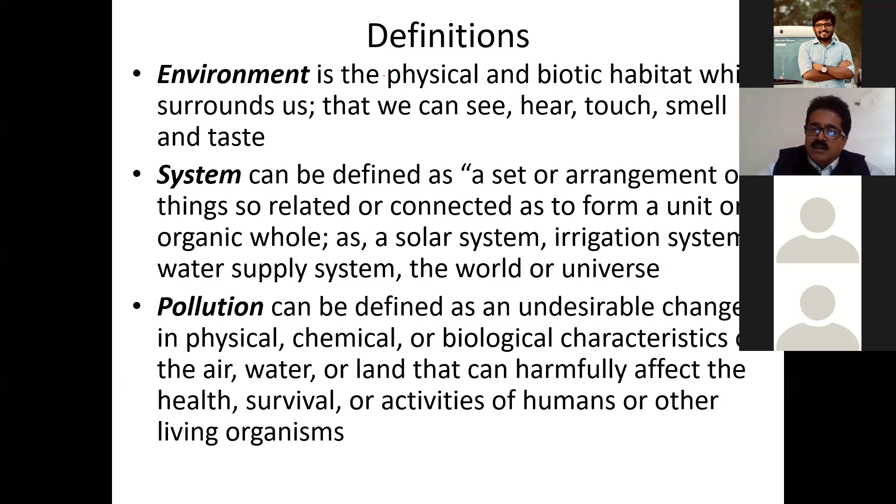The common word associated with environmental or civil engineering is pollution. So how do we define pollution? Pollution can be defined as an undesirable change in the physical, chemical, and biological characteristics of all aspects of environment, that is air, water, and land, which can influence or affect the health of people, survival, and interfere in all the activities of humans and other living organisms.

For example, if you take three systems, that is air, water mass, and land or solid waste, how they interact amongst themselves. For example, acid rain - how acid rain is developed or formed in the atmosphere.

Acid rain is a secondary pollutant formed because of the release of SOx and NOx from vehicular pollution. As these pollutants go into the atmosphere, because of multiple and continuous chain reactions in the presence of sunlight and moisture, they ultimately become acid mist - H2SO4 and nitric acid. When there is precipitation or rainfall, it washes down all these mists, and what we get is acid rain. Typically, acid rain has a pH of around 5.4 to 5.5.

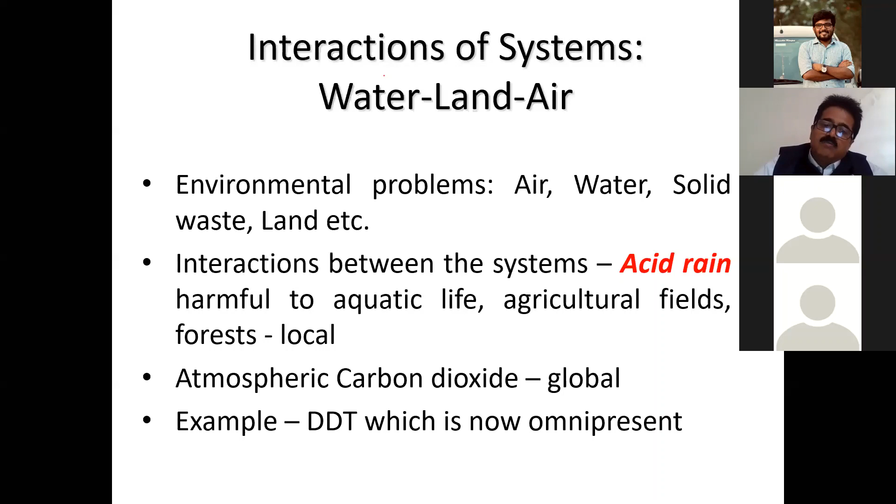Another aspect is air pollutants. Air pollutants, when released to the atmosphere, don't travel in a fixed direction. Depending upon the wind direction and wind velocity, they can go from one city to another, one state to another, one country to another, or even from one continent to another.

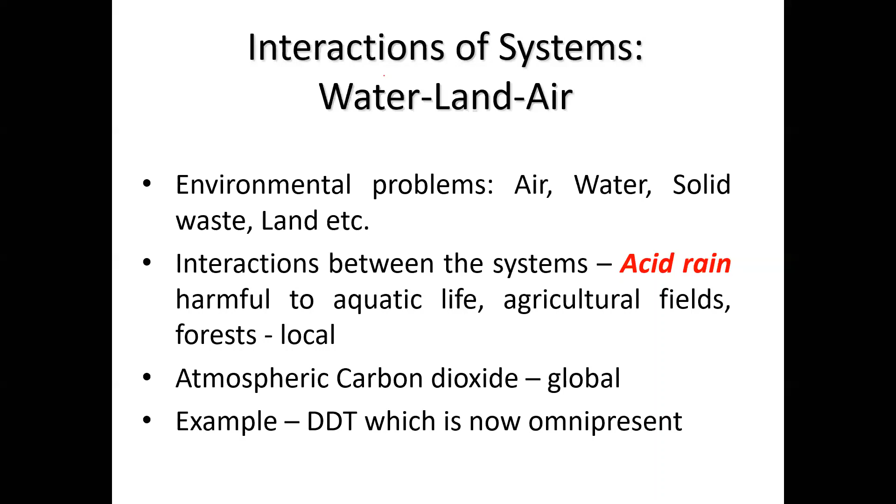There are some pollutants which are present everywhere in our environment - omnipresent, like DDT, which we use as an insecticide. Of course, DDT is banned throughout the world, but in India we're still using it, and traces of it can be seen everywhere.

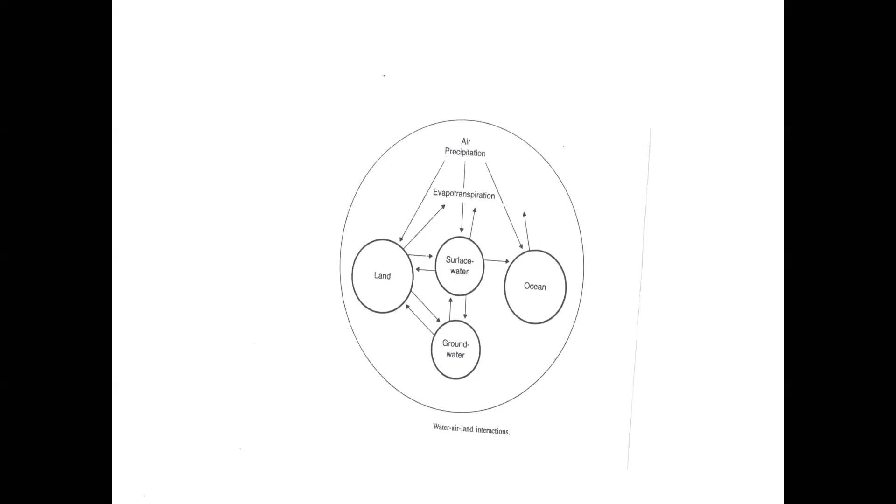If you look at the interaction of water and land, they are very interrelated to each other, like evapotranspiration forms clouds, which again brings rain to the earth.

If you look at the major benefits of science and technology, with improvement in science and technology, the standard of living is improved, and we are producing more and better quality food. This is again because of better science and technology, innovation, and research, and we are also creating better living spaces.

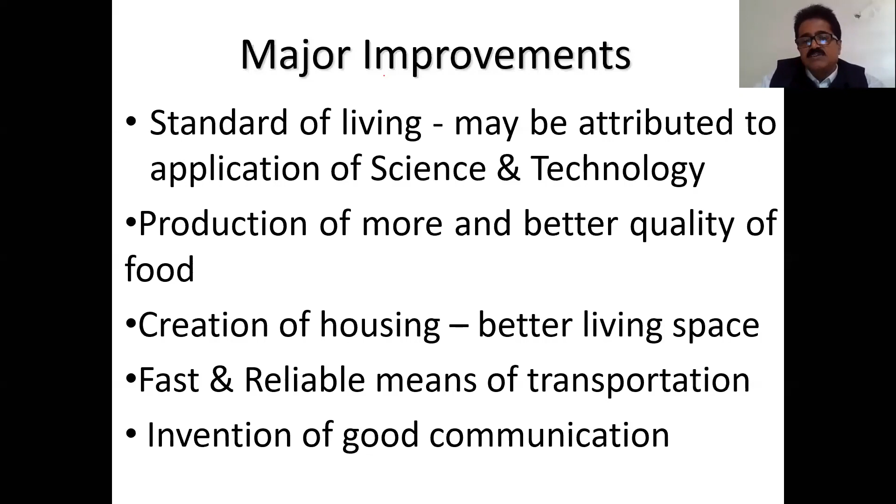And then you also have fast and reliable transportation systems, which is also because of the improvement in science and technology. And replacement of human or animal power by invention of machines is another feather in the cap. And definitely, supply of safe drinking water and disposal of wastewater is again because of science and technology.

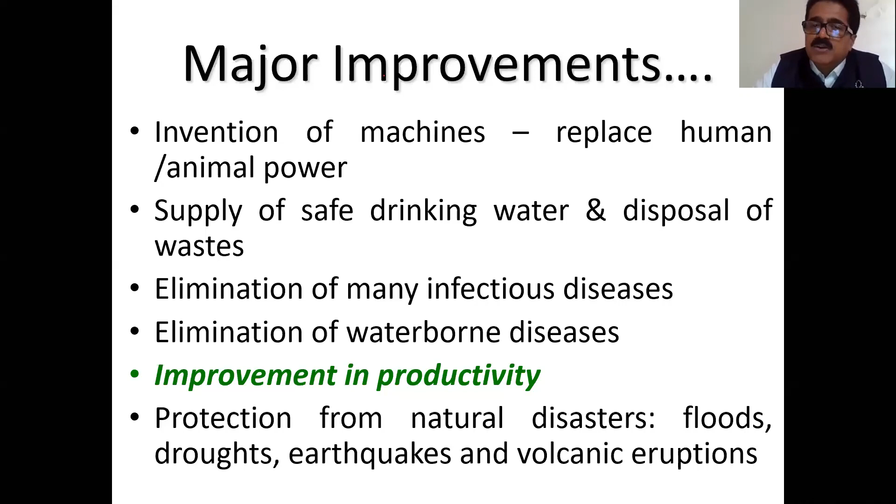And then the other aspect is elimination of many infectious diseases and waterborne diseases. About 70 to 80% of human diseases are waterborne in nature. If you're providing good drinking water and trying to eliminate all the waste, we can control this. And then in industry, productivity can be improved because of invention.

But at the same time, the flip side of development is environmental disasters or impact on the environment. This could be overuse of chemical fertilizer, which might lead to loss of fertile land. And also, in the name of development, forests are disappearing. And because of human activity, industrial or vehicular movement, there is a lot of environmental pollution.

And then there are also new organisms which develop some resistance to control, so that may be very difficult to get rid of. About 10 to 15 years ago, there was one bug which attacked the coconut trees in Karnataka, even Andhra Pradesh. That was very difficult to eradicate - you had to cut down the coconut tree and burn it so that the entire species was eliminated.

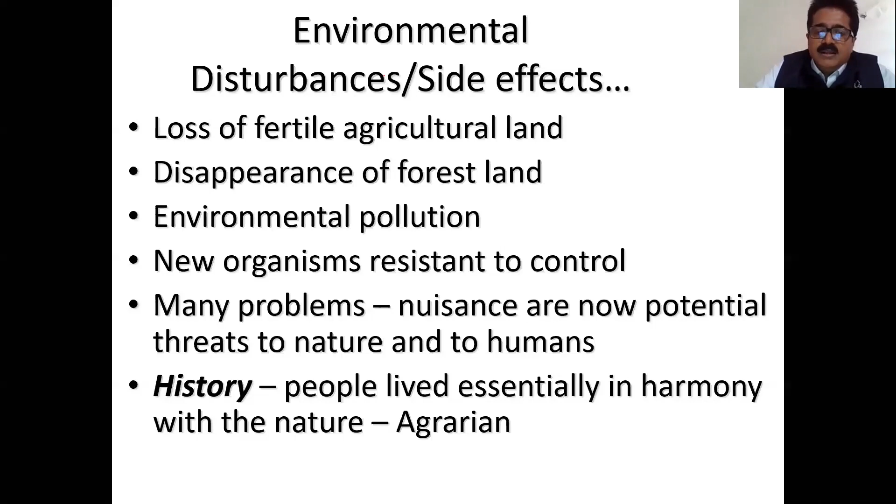If you look at history, in the agrarian age or society, there was very small activity - wastewater released was used for some purpose, and waste returned to land, so there was not much impact. But if you compare the Western world, Europe was very well equipped with respect to environmental engineering. They had systems for water supply as well as treatment of wastewater.

But on the other hand, the Americans did not bother much. In the middle of the 19th century, a lot of pollution was produced because of industrialization and the industrial revolution, and the problem of pollution aggravated. This could be because of urbanization and industrialization, and even today it is true - 19th century industrialization and urbanization is the cause of almost all environmental pollution.

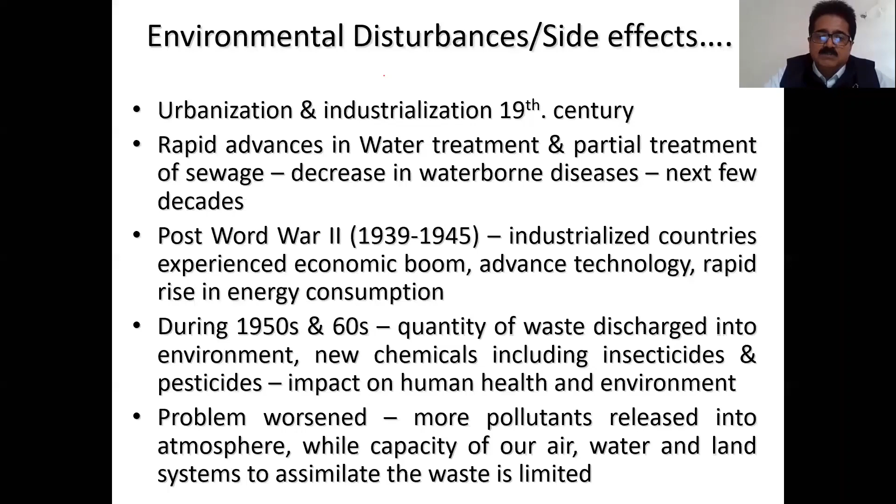And of course, post World War II, a lot of industrialized countries wanted to experience an economic boom, so they adopted technology, leading to a rapid rise in energy consumption. Because of this, again, air pollution and other pollutants were released.

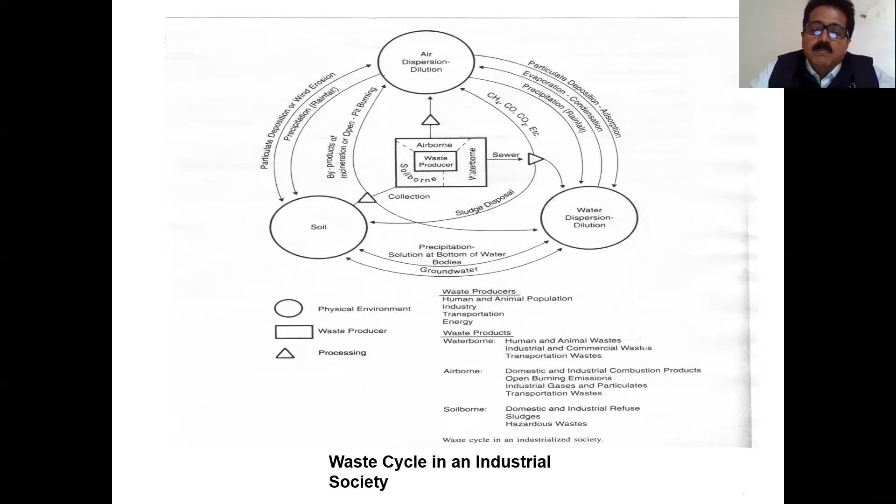If you look at the waste cycle in an industrial society, all the waste comes from all the activities, because of human activities and industrialization. Pollutants such as waterborne, airborne, or solid waste in soil were also created. Because of this, there was a lot of public awareness that was created.

And finally, somewhere in the year 1960, there was a lot of agitation, and people concluded that there could be no great society if water, air, and dumps of the cities are dirty - meaning they had to clean that. Because of this, the first legislation came into existence, which was the Water Act. The US EPA introduced this in 1970, followed by the first Water Act in India in 1974.

The third world countries - the developing or underdeveloped countries - were continuously emphasizing environment and protection of the environment. Whereas the developed countries were very much into industrialization and modern development.

And with this backdrop, United Nations declared 1980 as the decade of international drinking water and sanitation. Because of this, the amount to be spent was huge, but that was on a sharing basis - I think one-third was shared by the UN and the rest had to be with the respective countries. Towards the 21st century, the role of technology took the front seat.

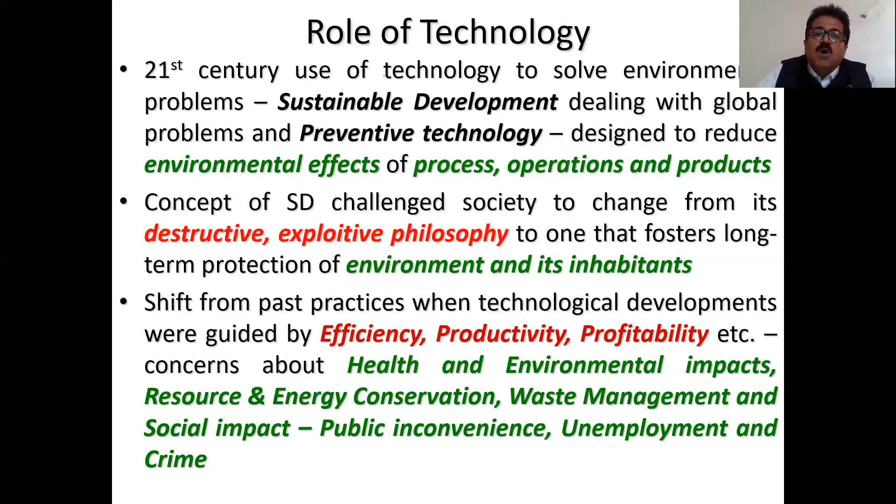of the earlier exploitative philosophy. This is very important. Earlier, they were only destructive and trying to exploit all the natural resources. Because of the introduction of sustainable development in the 21st century, they tried to implement, or think of doing, a shift from efficiency, productivity, and profitability to also showing concern about health, environmental impact, resource and energy conservation, waste management, and implications on social aspects. So all these things are definitely a part of preventive technology.

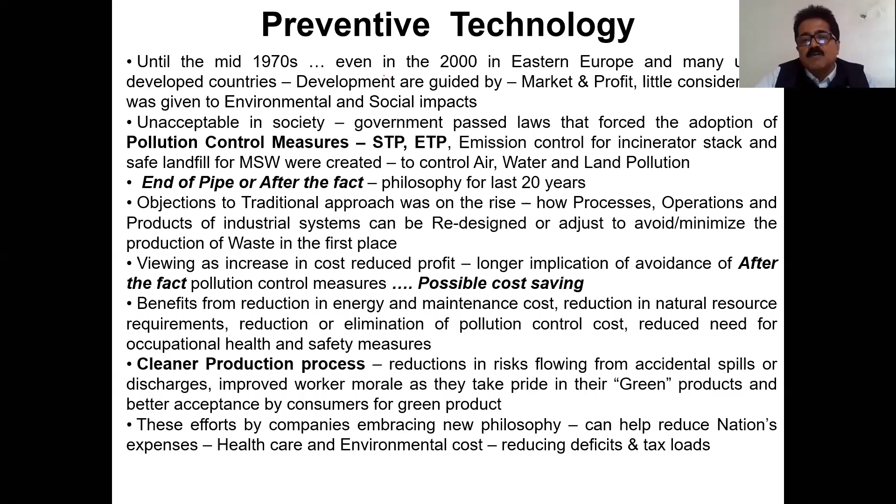It's given in detail, I'll not go into details, but one thing I'd like to highlight is the pollution control measures which they took in the beginning, somewhere around the 70s or 80s. So they started constructing sewage treatment plants and effluent treatment plants in specific industries in order to control the liquid waste and the solid waste, and also some pollution control measures towards air pollution.

Some of the industries, this is the latest information, like 3M, which is a globally known Fortune 500 company, have implemented some of the preventive technology, like what they call PPP, pollution prevention pays. Pollution prevention pays means whatever the company is investing in the measures they are taking towards pollution prevention, in the long run, it's going to pay back.

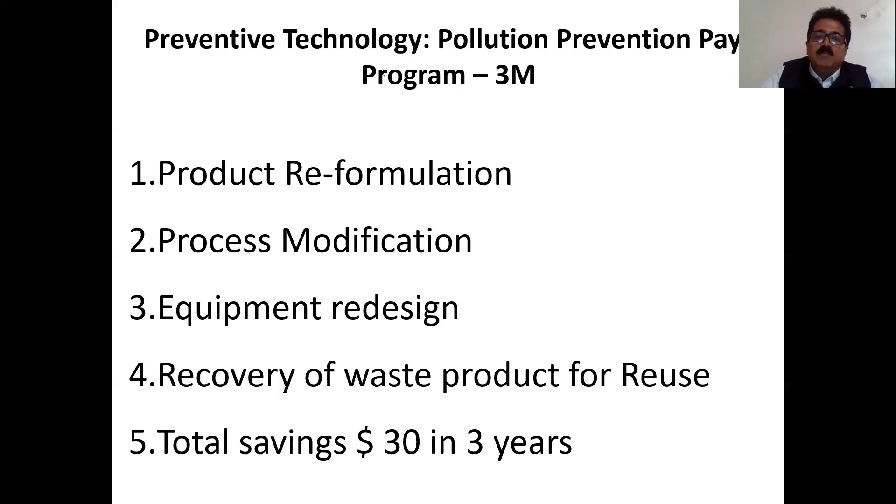For example, they adopted what is known as reformulation, product reformulation, process modification, equipment redesign, and recovery of waste products for reuse. Reuse, recycle, and reduce - the famous 3 R's - because of which one can definitely save a lot of money. They saved about $30 US way back in early 2000.

And later this WCED was called the Brundtland Commission. This is because Miss Brundtland, who was the former Prime Minister of Norway, was appointed as the chairperson of the commission somewhere in 1983 by the UN Secretary General. She worked on this for almost 4 to 5 years, and then she, or the committee, came up with what is known as the Brundtland Report. So that was the first initiative where sustainable development was made popular throughout the world.

Because of this, even today we follow, or rather we use, the same definition of sustainable development. It goes like this: sustainable development can be defined as the development that meets the needs of the present without compromising the ability of the future generation to meet their own needs. That means there are several ways of defining sustainable development.

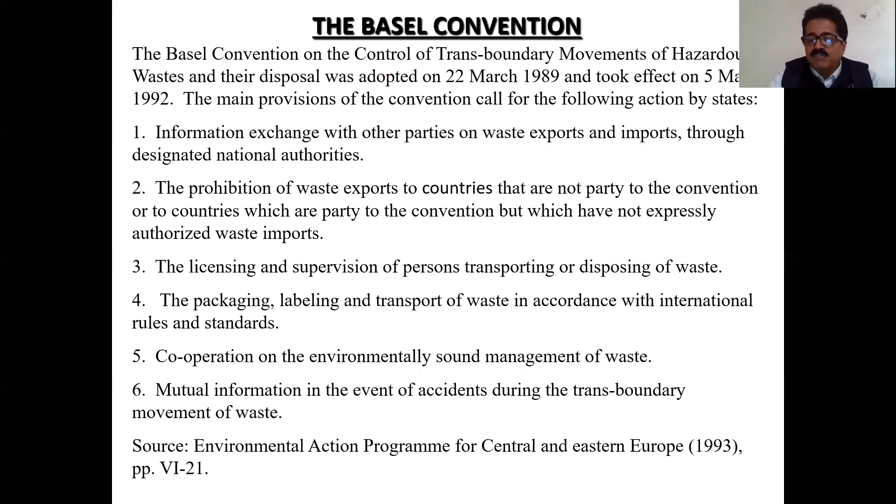Then in 1997 came the Kyoto Protocol. It talks only about the reduction of greenhouse gas emissions, which could be due to any industrial or process activities. There are several greenhouse gases, and all of them are expressed in the form of carbon dioxide equivalent. For example, methane is also a greenhouse gas, and taking carbon dioxide as the base, methane is 21 times more lethal or higher polluting compared to carbon dioxide.

So one of the conclusions or proposals was to reduce the average GHG emission by about 5.2% as compared to 1990, and as compared to 1990, we have to reduce the GHG emission by about 5.2%. This has to be achieved by 2008 to 2012.

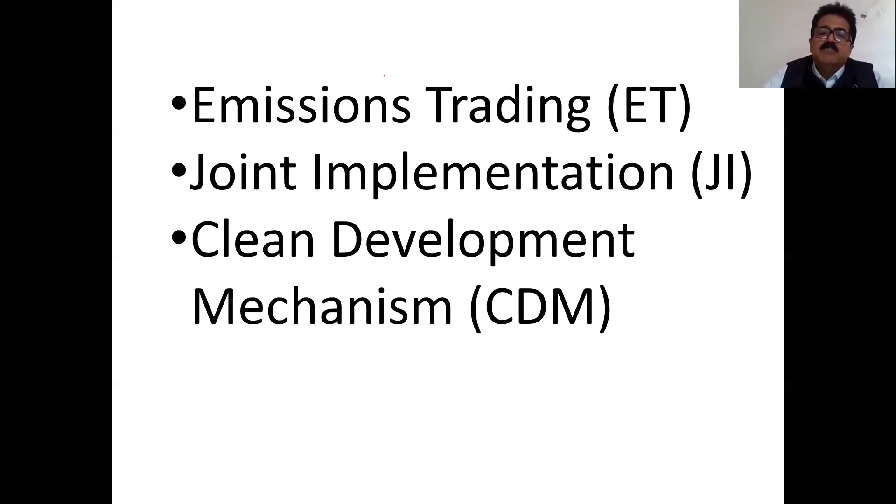If you try to see the latest information about this, you'll see it was one of the most successful treaties, and it is a flexible mechanism. We have emission trading, joint implementation, and CDM, clean development mechanism. I'll not go into details because of shortage of time.

This was somewhere in 2000. A small project was proposed by Delhi because around that time the Asian Games or one of the international games were proposed. So they thought, instead of leaving it like that, let's make Delhi look better and beautiful, and this was one of the projects proposed.

According to statistics, about 10 to 12 million tons of C&D waste is generated in India every year, and Delhi alone generates about 2,000 tons per day. These wastes are heavy and non-biodegradable, and most of the material is concrete, masonry, or bricks.

So what do you do with this? Can this be reused or recycled? Because there's hardly anything there, it's inert, meaning there's no binding capacity between the different constituents, and it's also non-biodegradable.

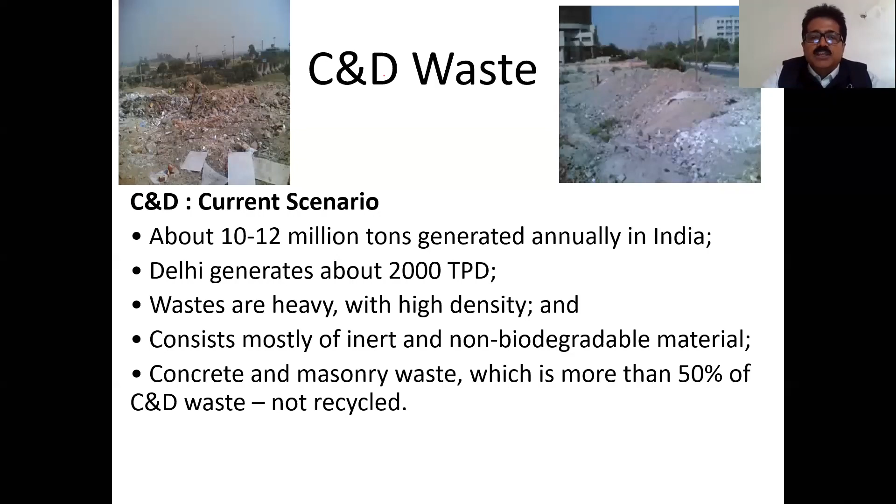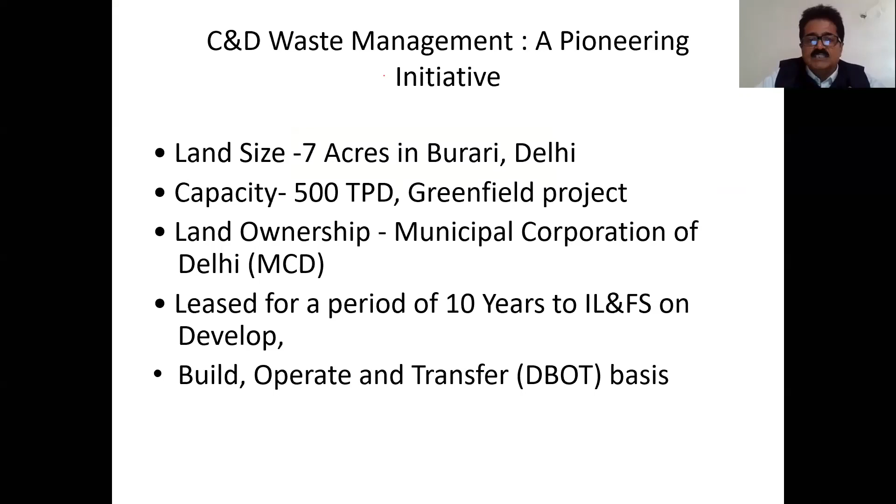So therefore, one of the pioneer projects proposed was at a place called Burari, on the outskirts of Delhi. They proposed this plant which can take care of about 500 tons per day, and it's a greenfield project, proposed by Delhi Municipal Corporation, leased for a period of 10 years, and financed by IL&FS on a build, operate, and transfer basis. This was abandoned or marshy land where they used to dump waste from the city, and this facility came up there, and this is the ultimate outcome of this.

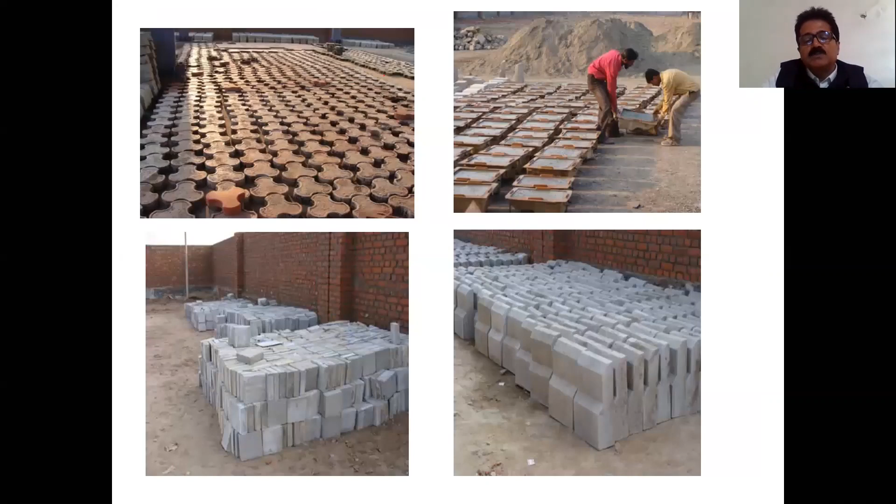Just by using some binding materials such as cement and then pulverizing, you can make interlocking blocks, road dividers, curbside blocks, paver blocks, etc. So these are the details of the project.

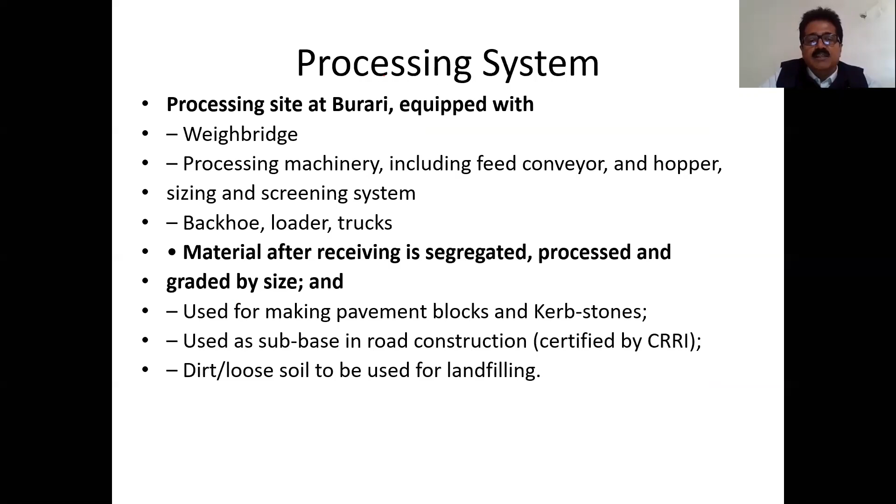One of the most important aspects of plastic waste is that plastic is now considered one of the hazardous wastes. So what do you do with this? The only way plastic can be well managed is to collect it properly, reuse, and recycle. All the plastic we use, bottles and other containers, have different codes depending upon their chemical constituents. If they are classified into their respective class codes, it can be very easily recycled. That is the only way you can do that.

Now if you look at human well-being, what are the various factors responsible for it? It could be physical, physiological, social, economic, and environmental. All these are responsible for well-being, meaning you're feeling happy and comfortable. And economic means you should have employment, income, wealth, and market.

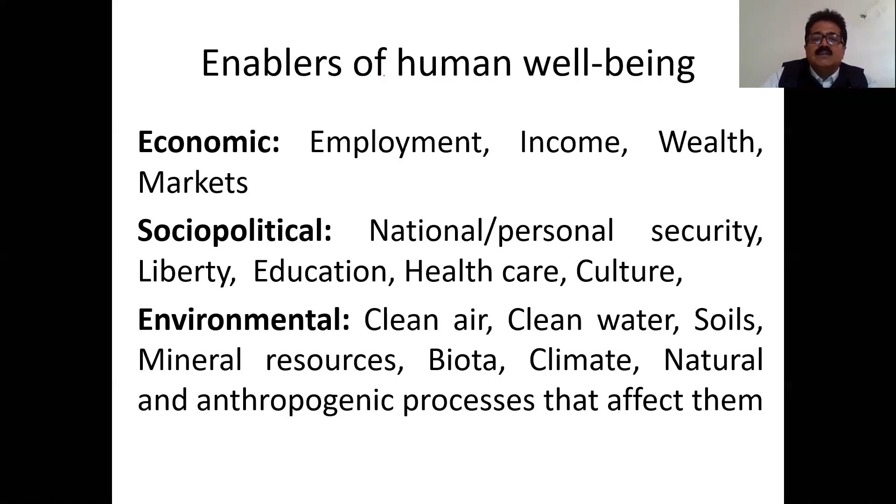Socio-political means national or personal security. One should have personal security, and of course liberty. Then you should have facilities for education, healthcare, and culture. And we also expect a better environment, clean air, clean water, better soil, and try to minimize soil pollution. We should have good natural mineral resources and try to have less anthropogenic interference.

Human well-being also depends upon the ecosystem, its goods and services. What goods is the ecosystem providing, and what services? The basic equation is that we produce food, or rather nature produces food. Nature is the biggest factory.

It produces food using carbon dioxide and the moisture present in the atmosphere in the presence of sunlight. What we produce is sugar, or food, and oxygen as an end product. The green plant, in the presence of sunlight, has what is known as the green pigment called chlorophyll, which helps produce all these things. So this is the world's biggest factory.

So if you look at the goods and services the ecosystem provides for the benefit of human beings: we have very good mineral resources, fossil fuel, water, soil, and oxygen. And the services the ecosystem provides include regulation of climate.

This is very important, otherwise you would have very hot, very humid, or very cold climate. There's also regulation of water flows, nutrient cycling, and pollination of flowers and crops. This is very important, like in an ecosystem there are different partners involved.

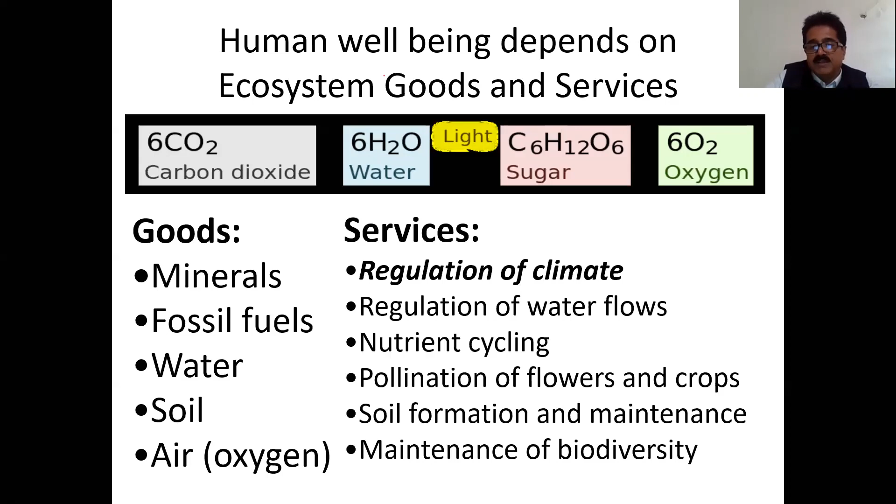As I said, here's another case study I'd like to discuss. Hazardous waste is produced from most industries, like chemical industries. This hazardous waste, the industry is not supposed to treat themselves. They're supposed to classify, segregate, and preserve it, then hand it over to a person who is authorized to take care of it and manage it.

Usually 3 months is the time period where you can store hazardous waste before it is taken away by the authorized person. But because of lockdown, now that is increased to about probably 6 months.

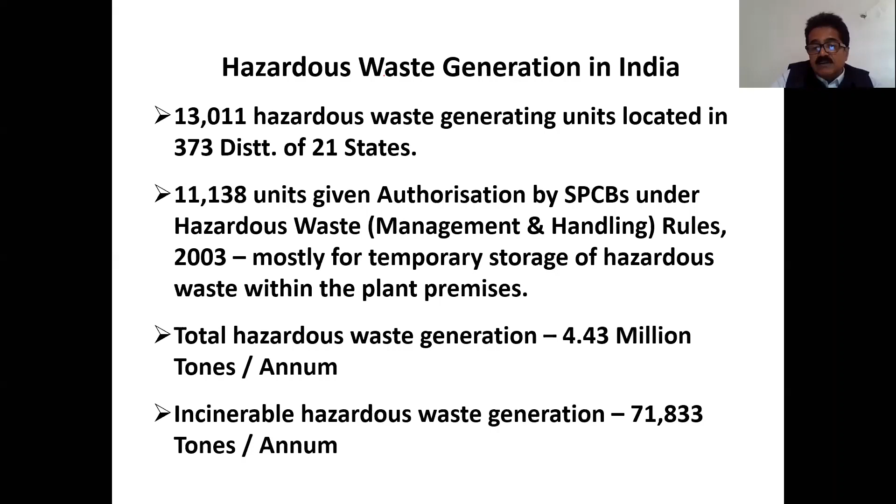This is some statistics on how much hazardous waste we are generating. Of course, slightly old statistics, but still we can say around 4.43 million tons per annum. And in that, incinerable hazardous waste generation is around 71,833 tons. Incinerable means these will have some calorific value.

For example, one of the common hazardous wastes we see is the sludge generated from a sewage treatment plant or any wastewater treatment plant, that is also considered hazardous waste. Usually what we do conventionally is use hazardous waste incinerators or designated landfill sites in order to manage or dispose of it. This is the only way where you can manage hazardous waste.

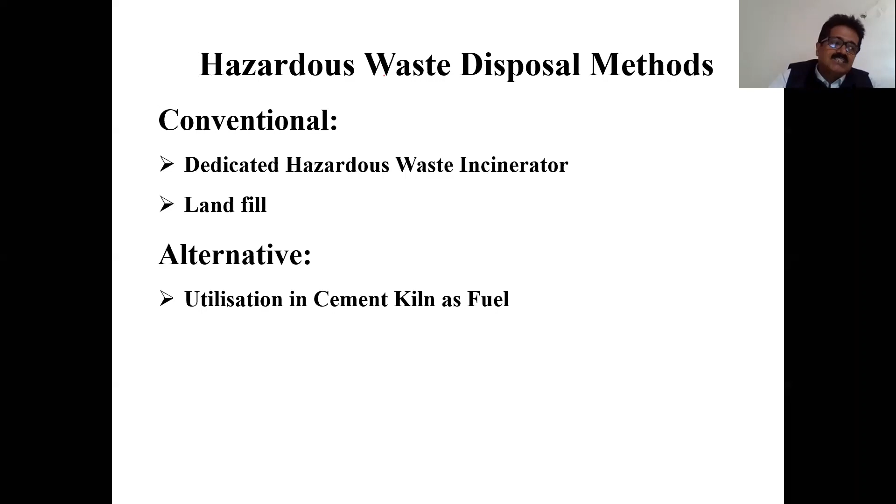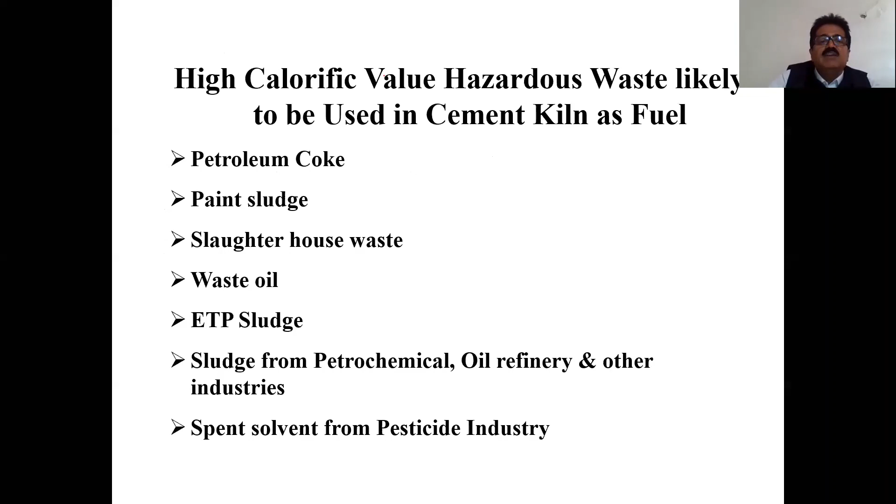But alternatively, you can also utilize this in cement kilns, in the manufacture of cement, as an auxiliary fuel or add-on fuel to whatever existing fuel they are using. Some of the high calorific value hazardous waste comes from the petroleum coke industry, paint sludge, slaughterhouse waste, waste oil, ETP sludge, that is effluent treatment plant sludge, and any sludge from petrochemical oil refinery. All these definitely will have very high calorific value, and that can be used comfortably in a cement kiln.

The high temperature in the cement kiln is the unique feature of this. The flame temperature touches around 2000 degrees centigrade, whereas inside the furnace, the kiln is around 1400 degrees centigrade.

So if you are using hazardous waste as fuel with a residual residence time of 4 to 5 seconds in an oxygen-rich atmosphere, this leads to destruction of all the organic compounds found in the waste. That means no waste is produced.

Only some gases that are released because of this may have some acidic nature, but during combustion they are neutralized by the raw material, which is alkaline in nature. All the raw material we are using as fuel is alkaline in nature, and because of this, even some of the gases escaping, which are acidic in nature, are also neutralized.

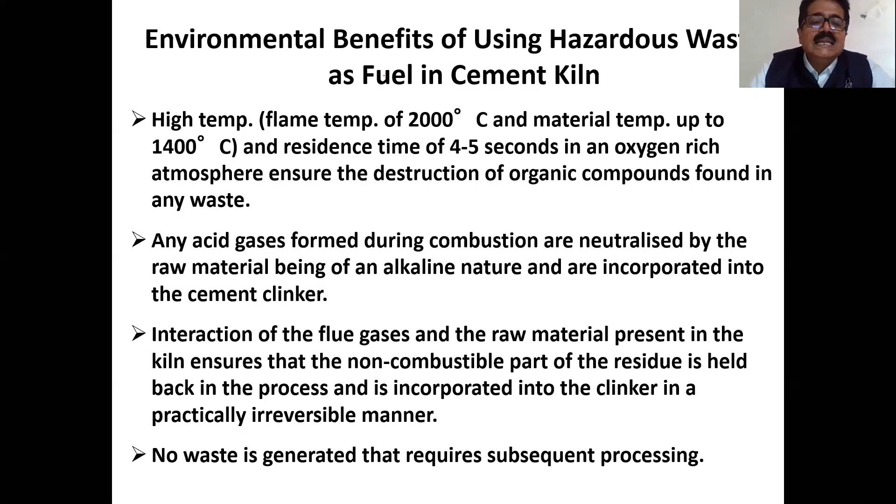There could be some residue left. Interaction of flue gases and the raw material present in the kiln ensures that the non-combustible part, whatever residue remains, is held back in the process and is incorporated into clinker in an irreversible manner. That means it is used in clinker manufacturing. Clinker is the stage just before grinding into fine powder of cement.

They are usually round in shape.

Some of the benefits are: you need not take care of hazardous waste disposal separately. This is an integrated solution for waste management and conservation of fossil fuel, because using this you can save some fossil fuel. There's also immobilization of toxic and heavy metals, everything taken care of within the kiln, and definitely you can reduce energy and cement production costs.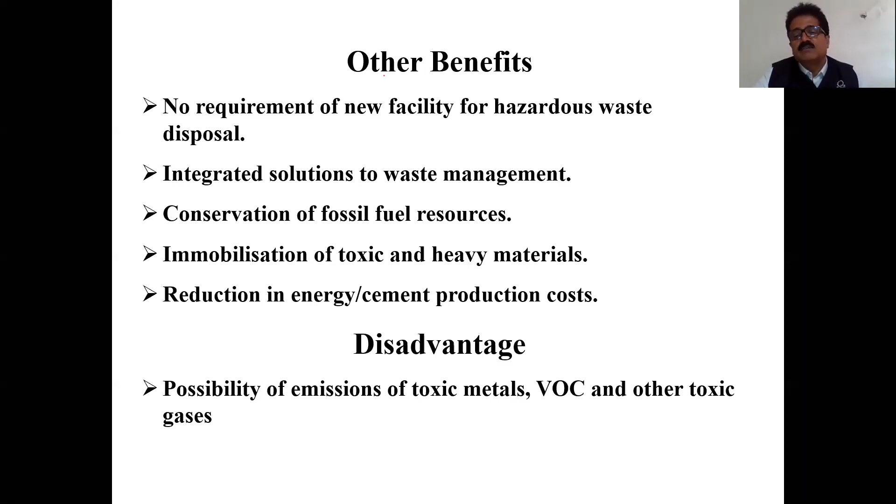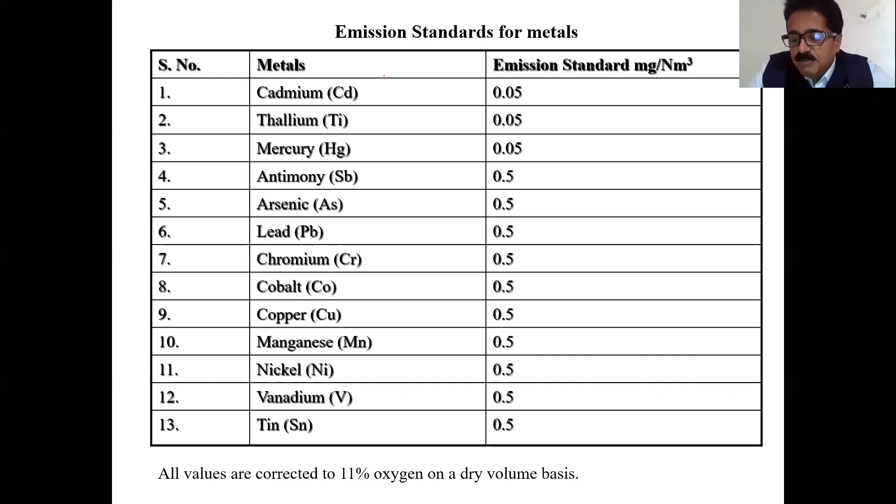One of the disadvantages is that some emissions might contain metals, volatile organic compounds, and other VOCs and toxic gases. Of course, again, some emission standards are given, and most of these cement industries are provided with control equipment such as ESP, which will take care of all these things. So that is where you can take care of hazardous waste.

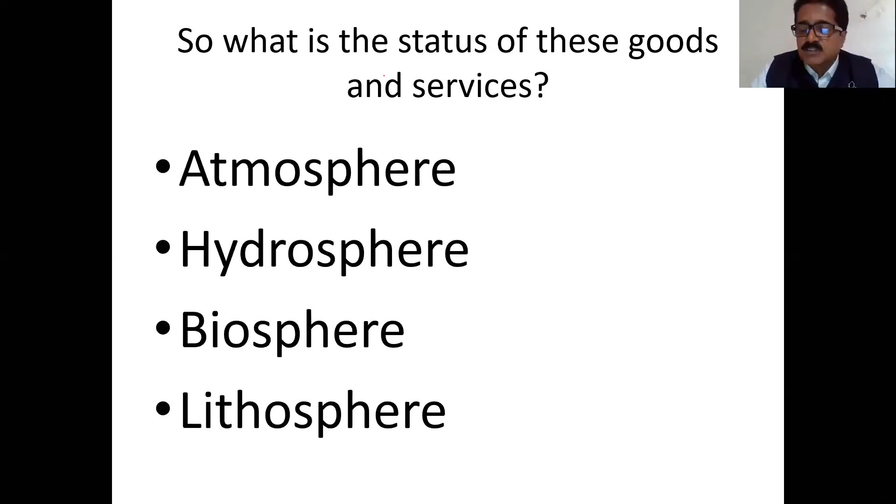What is the status of these goods and services? Like we discussed, we are talking about the services provided by the ecosystem, the goods and services provided by the ecosystem. Now, what is the status of this because of human intervention? That is atmosphere, hydrosphere, biosphere, and lithosphere.

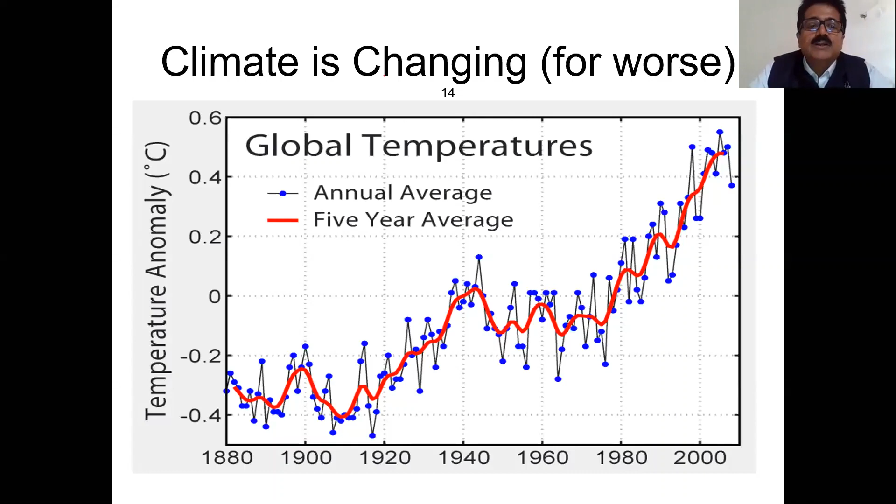If you look at the average over 5 years, it is almost increasing. The increase in temperature as compared to 1900 is around 0.6, that is 0.75, plus or minus 0.2, as compared to 1880 and 1900.

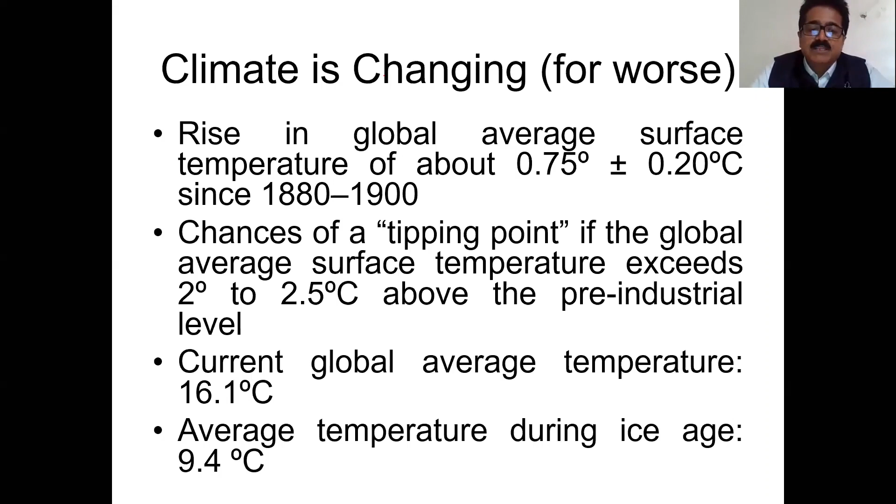And then because of climate change, this can also go beyond 2 degrees. So what will happen if it goes beyond 2 to 2.5 degrees centigrade as compared to pre-industrial level? The current global average temperature is around 16.1 degrees centigrade, and average ice age temperature is around 9.4 degrees centigrade. Suppose the impact of this is...

If you look at the water quality in major cities of different states, and the concentration of arsenic, which is one of the lethal or toxic substances, the safe drinking limit is only 0.01 milligrams per liter. Some states have as high as 2.4. Luckily, Karnataka is still below, but still not meeting the standards. Groundwater is also somewhere close to 0.05.

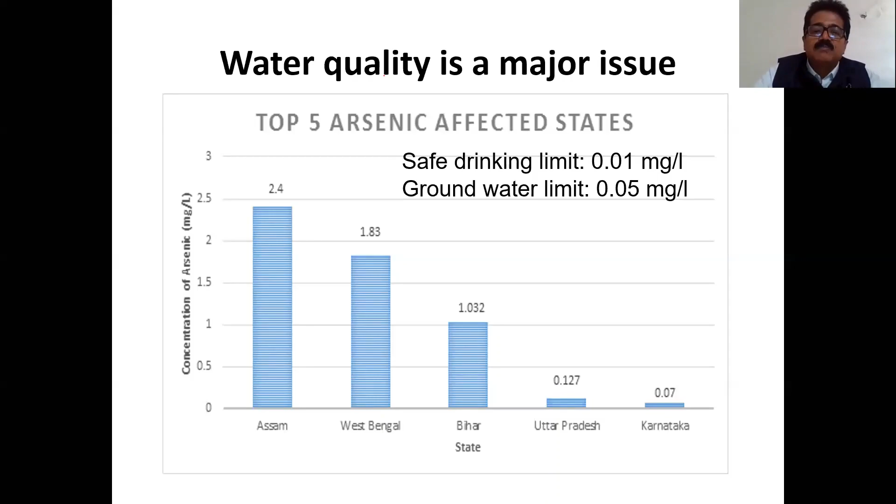Hypoxic zones are those zones in natural water bodies which have depletion of oxygen, meaning dissolved oxygen level, if it goes below 4 or 4.5, then the aquatic animals feel somewhat uncomfortable, and they try to move towards a higher level of oxygen. If they don't get it, then what you see in the bottom picture is the fish kill, or death of fish, because of being devoid of oxygen.

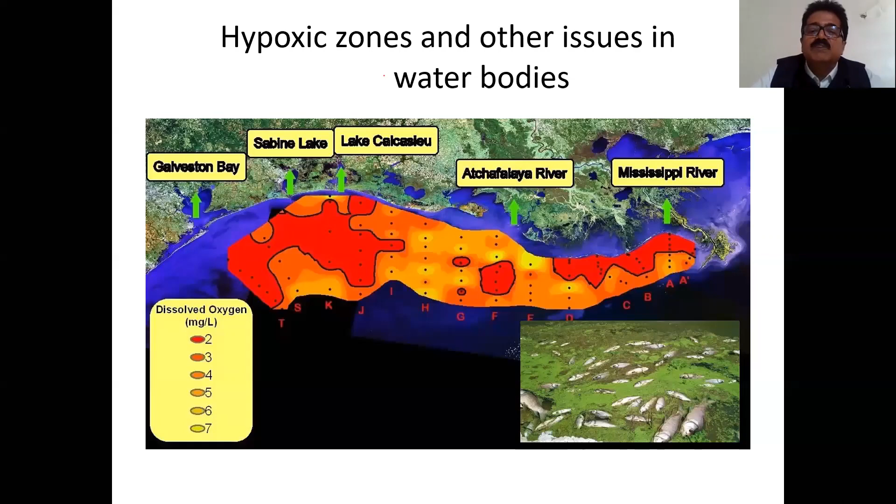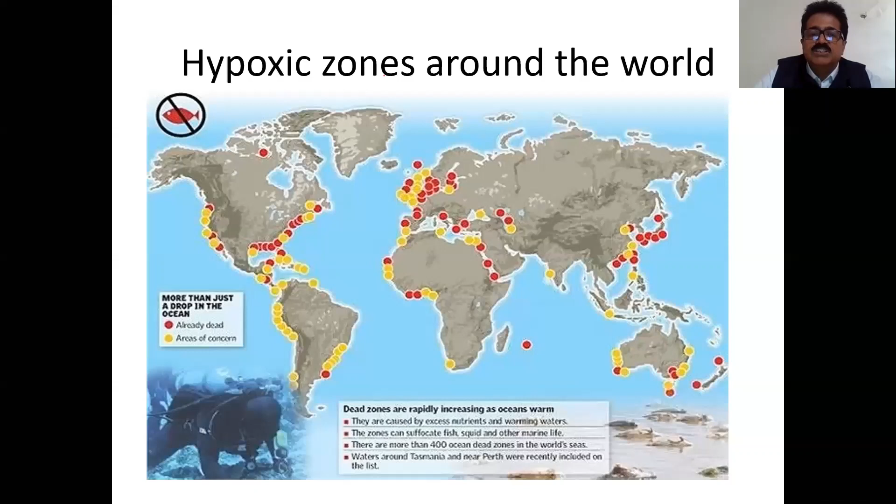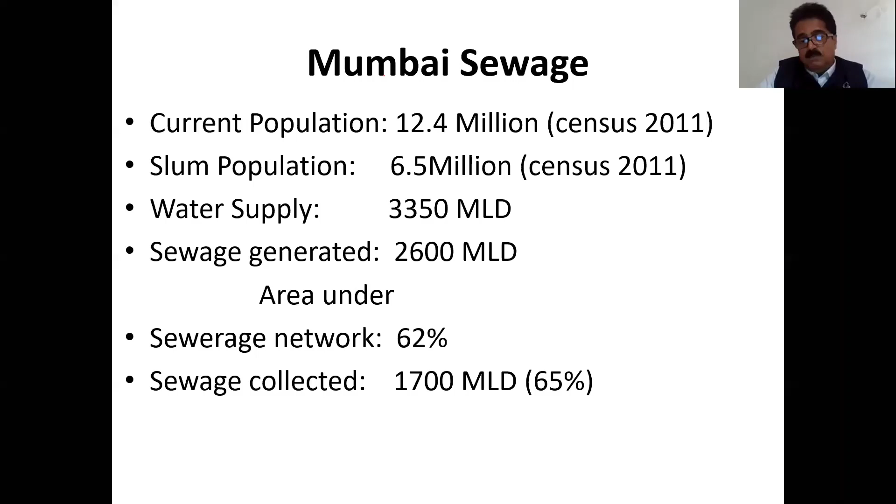If you look at the Mumbai sewage scenario, the population in 2011 is about 12.4 million, and slum population is around 6.5 million. Water supply is 3,350 million liters per day, and approximately 80% of that goes as sewage, around 2,600 MLD. They have about 62% sewage network coverage, because mostly in slums it's very difficult to collect, so it goes as open drain and reaches nearby water bodies. Approximately 1,700 MLD is collected, about 65%.

And what do we do with this? Mumbai is a national capital as far as economics is concerned, but the land cost is very, very high. So the provision for treating the sewage is huge, but we still have good old aerated lagoons which can treat about 430 million liters per day. Then we have other outfalls, marine outfalls. A marine outfall is where you lay a pipe which goes inside the sea, and the waste or sewage is disposed of there. We have another treatment plant which can take care of about 390 MLD, but still a lot of wastewater is untreated.

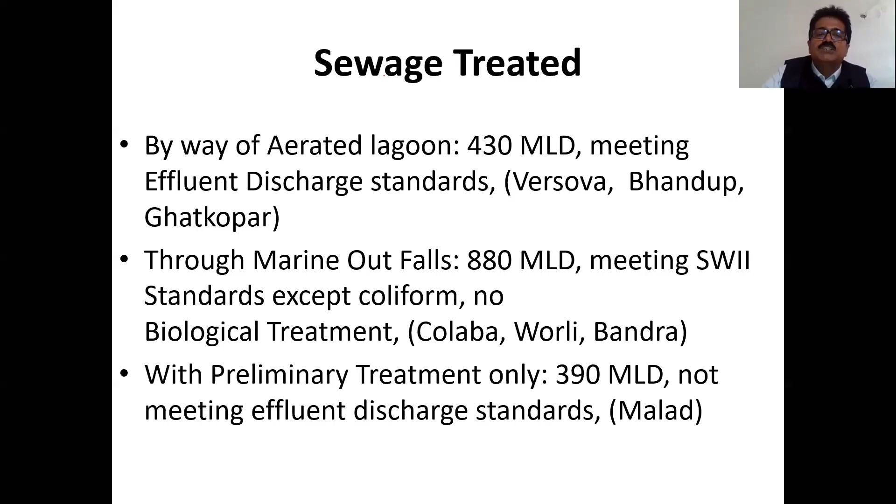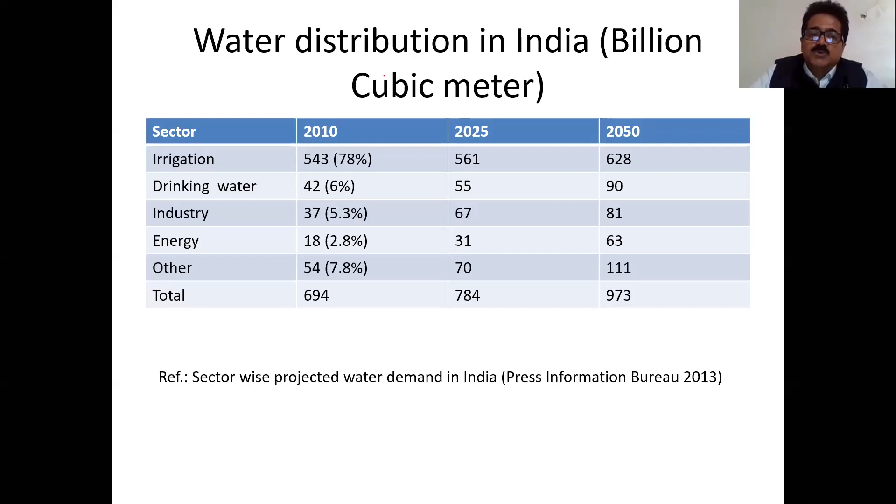How do we get this? With the current situation we have a lot of industrial pollution, and most of the rivers are polluted. We don't have other sources, so we'll have to search for an alternative source. So what is that alternative source?

Like we tried to clean Ganga. This Ganga Action Plan was implemented in 1986, and the main objective was pollution abatement, that is pollution prevention, improvement in water quality, and diversion and treatment of domestic and industrial wastewater, at least at the primary level. The Ganga Action Plan is still going on, phase 5 or 6 now.

Now all the IITs are clubbed together and trying to give some solution. All 7 old IITs, and IIT Kanpur is coordinating this activity. For pollution abatement, they tried to construct primary treatment facilities.

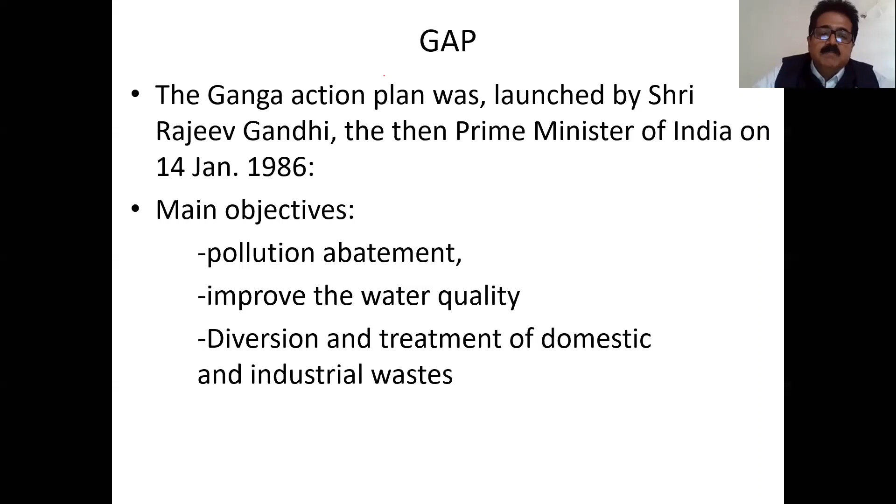But there is not much improvement in water quality, especially since the Ganga is considered a holy river, and most pilgrims visiting Haridwar or Kashi try to take a holy dip. But according to tests conducted, the E. coli level is much higher than the specified quality, and it is unfit for bathing. Still, people have that blind belief and they continue doing it.

One solution example: one of the industries, Rashtriya Chemicals and Fertilizers, situated in Mumbai, had their water supplied by Bombay Municipal Corporation. RCF is highly water intensive with no other water supply source, requiring around 28 million liters just for cooling purposes. Since they were not getting that water from the municipal corporation, the cooling water towers were shut down, and production was stopped for about 15 days.

The loss incurred was up to 50 crores. So the industry thought for a while and came up with two proposals. One was to use nearby seawater, desalinate it, and use that in the process. The other was to use sewage treatment plant waste, that is domestic sewage, as a source, treat it, and reuse it. They adopted the second option, establishment of a sewage treatment plant.

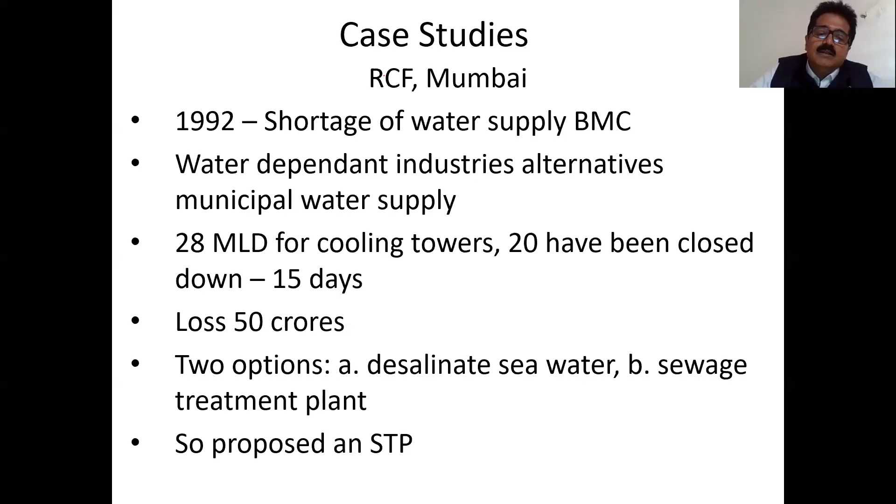They proposed what is known as tertiary treatment, that is reverse osmosis process. At that time, the cost was around 40 crores. But here they had to get sewage, which is again controlled by the municipal corporation. The amount of water the municipal corporation was providing cost rupees 22 per cubic meter.

Whereas domestic supply was highly subsidized, only 0.6 rupees per cubic meter. So when they stopped that, the revenue stopped for the BMC. The BMC gave a green signal with a proposal that RCF had to pay 60 paisa for every liter of sewage they used. With this, they successfully implemented the RO plant, which is a tertiary unit.

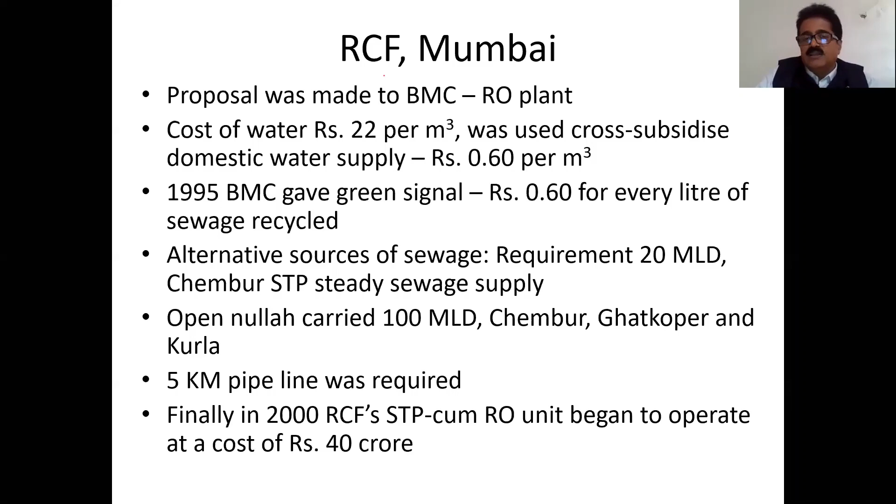This was finally completed in 2000, and till today it is working in good condition. That is another example I just wanted to quote.

The surface water quality, as proposed by the Central Pollution Control Board, classifies rivers or water bodies according to their best designated usage, like A, B, C, D, E. Class A is a drinking water source without conventional treatment but after disinfection. That means even water from class A has requirements with respect to different parameters.

I won't go into details, but disinfection, that is killing of harmful microorganisms, is essential. Class C is a drinking water source after conventional treatment and disinfection.

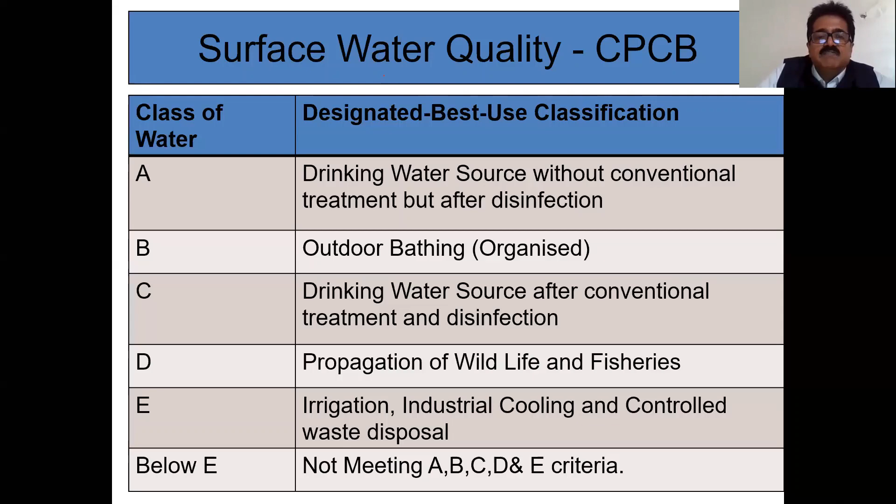Coming to oceans, which are huge bodies, they absorb a lot of heat. Almost 30% of the world's coral reefs are already severely damaged, and another 60% will be damaged by 2030. This will have a severe impact on fish, because coral reefs are the breeding place for fishes. Also, absorption of carbon dioxide from the ocean surface is adding a lot of carbon into the water.

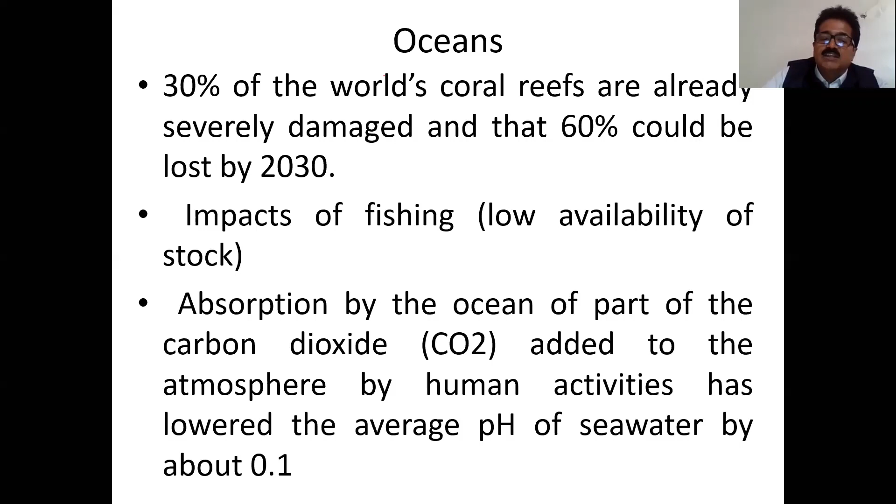The pH of the water is turning very acidic, and that is leading to fish kill. And if you look at the biota, that is the number of species with respect to marine, freshwater, terrestrial, as well as others.

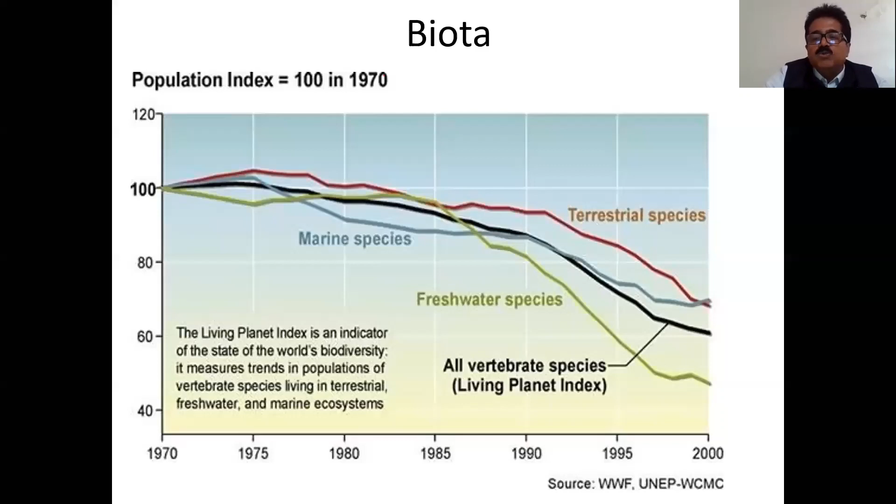The index was 100, somewhere around 70, and towards 2000 it has come down as low as 60.

Another example of human intervention is this, I'm not sure about this lake, Bellandur Lake in Bangalore. I got this photograph, but I'm not sure. I think so. You people can throw some light on this later when we are discussing.

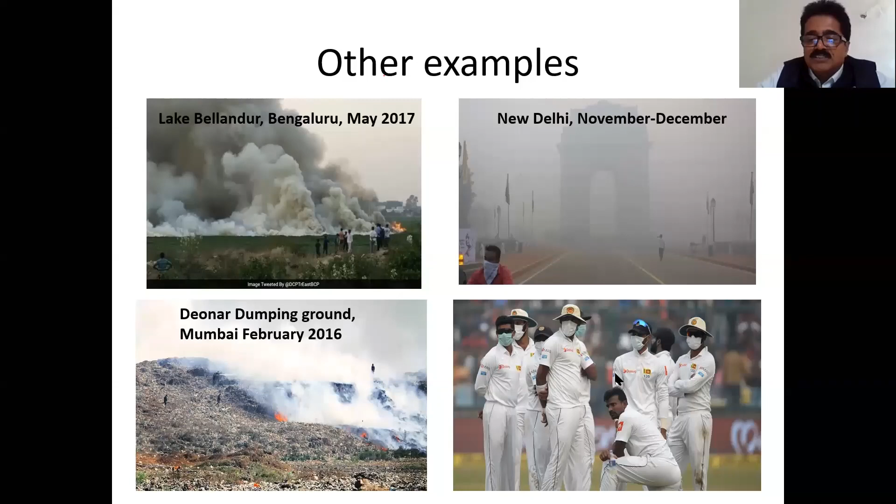And this is the normal scene, what we see. This is India Gate in Delhi, somewhere in November, December, because of the fog. And Deonar dump is one of the largest dumping grounds for municipal solid waste, which is 111 hectares. Imagine 111 hectares of land in Mumbai. What is the land cost? And of course, unfortunately, sports activity is also affected.

I was referring to this figure that time. This is giving the climate change, impact of climate change. On the y-axis left side, you have the global temperature, and on the right side, concentration of carbon dioxide. Carbon dioxide is increasing right from 1880, where industrialization was at its peak, and it is increasing even today. And you can see the increase in temperature.

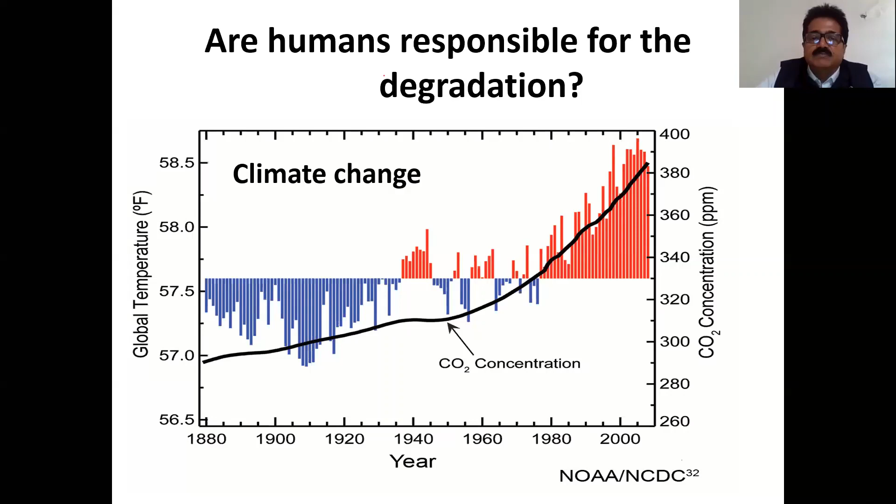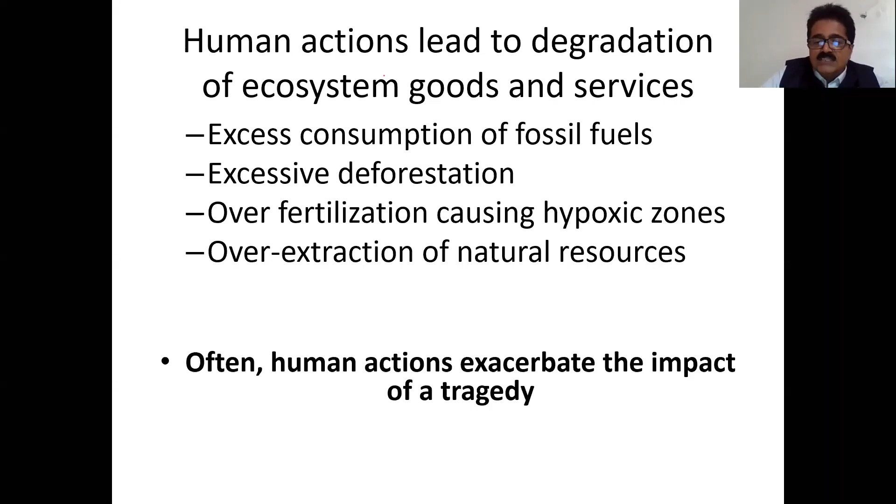So therefore, human action is the only reason for the degradation of ecosystem goods and services. That is excess consumption of fossil fuel for industrial or vehicular purposes, excessive deforestation, use of more fertilizers, and extraction of natural resources. All these are the reasons, and you can say the picture says a thousand words.

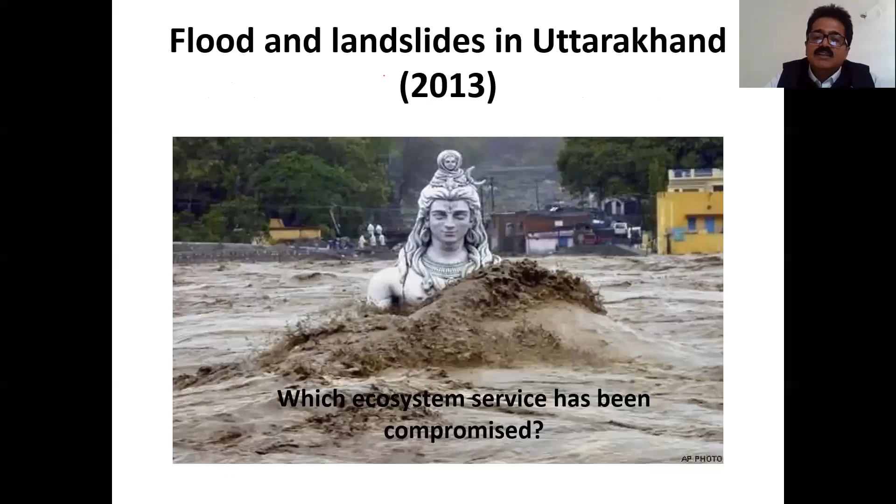Okay, so all these things are unsustainable. What we are discussing is sustainable development. So all these things are unsustainable, and they are all because of human intervention. So sustainability goes beyond global warming and climate change.

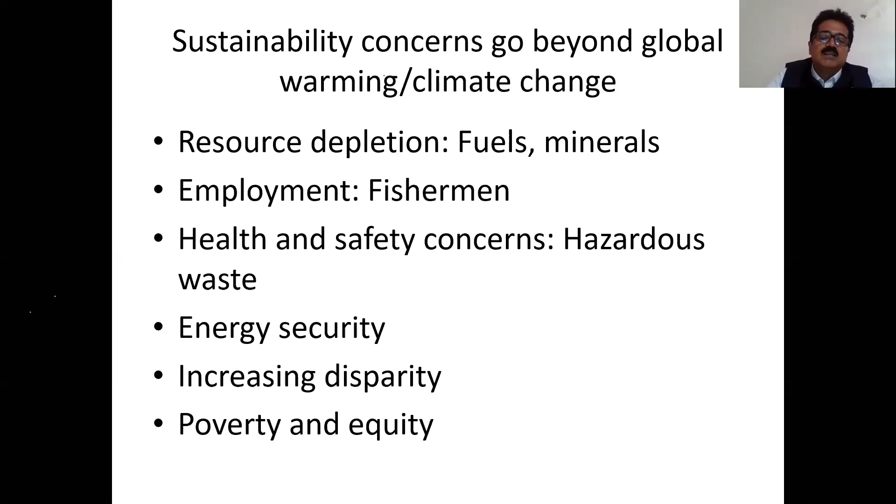But definitely you should think of resource depletion, saving, or trying to conserve resources like fuel and minerals. If you allow this unsustainable nature, then most of the fishermen are out of job, along with health and safety concerns due to hazardous waste, energy security issues, and increased disparity, where poor become poorer and rich become richer. Poverty and inequality, especially with respect to resource sharing and other things.

Okay, last few slides. There are some tools for sustainable development. I cannot go into details because LCA, the life cycle assessment itself, is a very large and huge topic in itself. Several books have been written on LCA.

Another very important tool is design for environment. When we are designing any product, you have to think about environment, and some thinking should go in terms of environment so that you can do justice to environment and avoid what is known as environmental pollution.

So some of the basic objectives of design for environment is design for recyclability. At the end of its lifetime, any product that is used can be recycled, or you should have provision for recycling, and that can be used in other products. For example, all the components in a computer can definitely be used in other computers, or in other manufacturing facilities. And then design for remanufacturing.

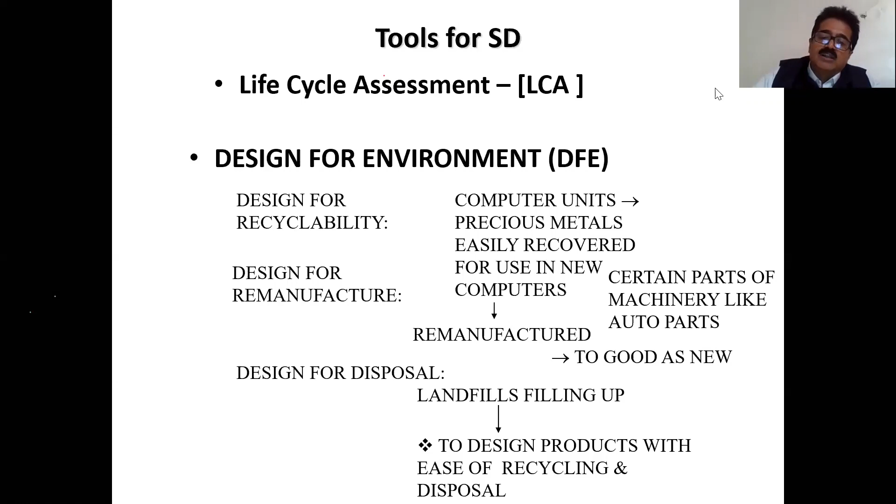That's very important. So, concluding this, human well-being definitely depends on ecosystem goods and services, and most of these goods and services are being degraded because of human intervention. These issues are highly complex, interdisciplinary and multidisciplinary. The present situation as of now is unsustainable, and we'll have to think of newer methods whereby we can make it sustainable. So definitely sustainability is not only environmental protection, but also the health of people, the community, the resources, and of course the profit also.

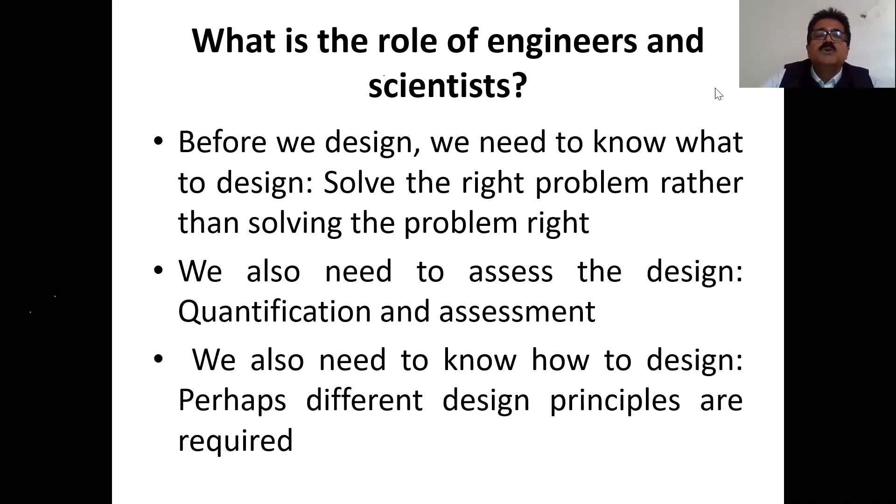So therefore what we should do as an engineer, before we design, we need to know what to design. That is, solve the right problem rather than solving the problem right. So we also need to assess the design, that is quantification assessment - what is the impact of this design tomorrow when it is given for use for the stakeholders. We also need to know how to design. Perhaps different design principles are required so that you can do it in a better way.

So for the learning outcomes, I feel you have recognized the importance of sustainability, and you can also analyze and evaluate what are the problems from a sustainability perspective, and understand the reason for unsustainability. I hope this is all I have from my side.

There are several things which you can decide. To conclude, I would only say the famous story of the 5 blind men trying to touch an elephant, each saying the elephant is like this, elephant is like this. Sustainable development is something like that - it is multi-dimensional, and even if you take one dimension, you can discuss it for days together. I hope I haven't bothered you much, I've taken a lot of your time. Thank you very much, thank you for your patience.